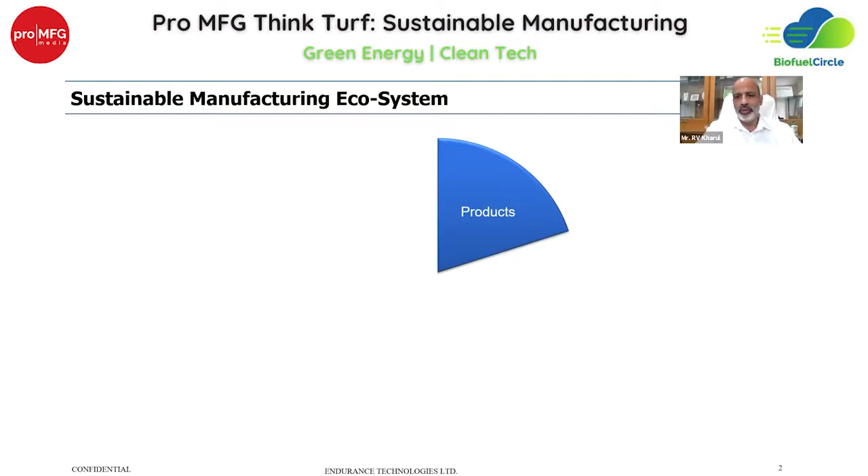For our products, like in the automotive industry, which I'm talking about since I've been in it all along, our vehicles run on fuel. So certainly the first thing is: can we eliminate the fuel itself? I'm sure that's not possible. So we start looking at: can we reduce it? First, if I do lightweighting, the requirement of fuel comes down immediately. So how do we do lightweighting, or other things, like getting onto hybrid vehicles or electric vehicles, so that we move towards more sustainable efforts.

There are many other things to do as well, not directly linked, for example, even reducing the plating, like hard chrome plating.

If we can reduce that, we are going towards more sustainable things. Once we look at all different aspects of product design, the next thing is what processes are involved. Are we really looking at sustainable processes? We can look at whether sustainable processes are being followed, reduce the number of processes, or look at which are environmentally friendly processes. For example, when we use a conveyor system in manufacturing, can we make good use of gravity and reduce the energy requirement itself?

Though it appears very simple, I'm sure it is quite difficult to implement everywhere. So at least wherever you can, that much you can reduce the energy. Every bit and piece of energy saved is helpful.

In the processes also, when you are using compressed air, can I reduce the wastage of that? Everywhere, if you see compressed air just letting go, if you close all those loopholes, I think you can save a lot. Later I'll show you how at Endurance we got a good benefit out of looking at all these small wastages too.

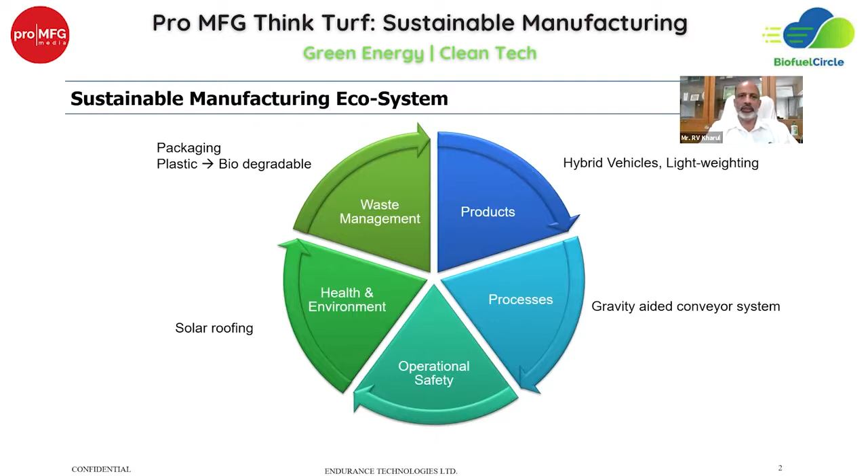When you look at sustainable lean manufacturing, it's also one more step towards sustainability. Looking at whatever the customer demand pull is, what are the things we are doing to ensure this sustainability? So start with a single piece flow, or start looking at load balancing capacity.

Applying simple principles like: do I require this process at all? Or can I eliminate it? Or can I reduce it? Or can I simplify it? Can I rearrange it? There are different things we can look at in order to make it more sustainable.

Then 5S at the workplace - though it appears unclear how it's going to have a sustainability impact, believe me, if you do that properly, you will be reducing a lot of waste, a lot of unnecessary efforts, a lot of non-value added activities, and that helps in enhancing our sustainability. Then just-in-time inventory also helps in reducing our inventory, which in a way means we are looking at sustainable products.

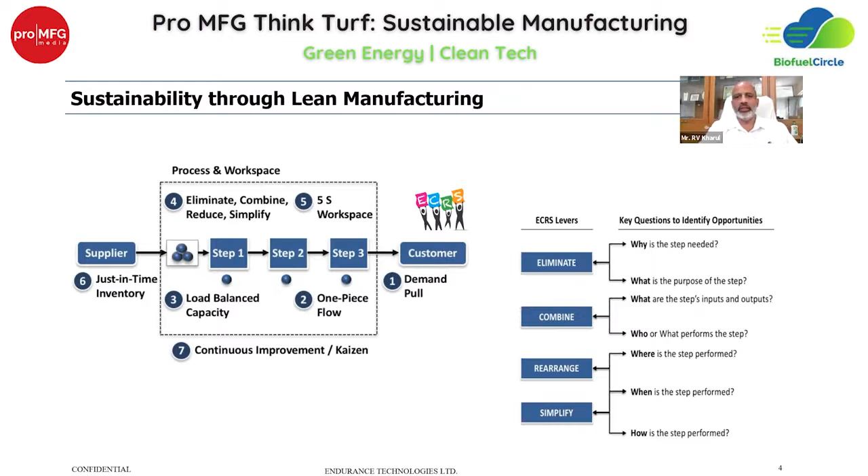So when we look at the keys to sustainability, the interesting thing I felt is that if we increase our vocabulary and imbibe the vocabulary of 're', I tried to put in as many 're' words here as possible. If you read through it, I think everywhere there is sustainability involved - whether it's replacing something with regenerating, rework, replenish, reform, reuse, reclaim. I can go on reading it. Everywhere you can implement it such that you inch towards a sustainable future.

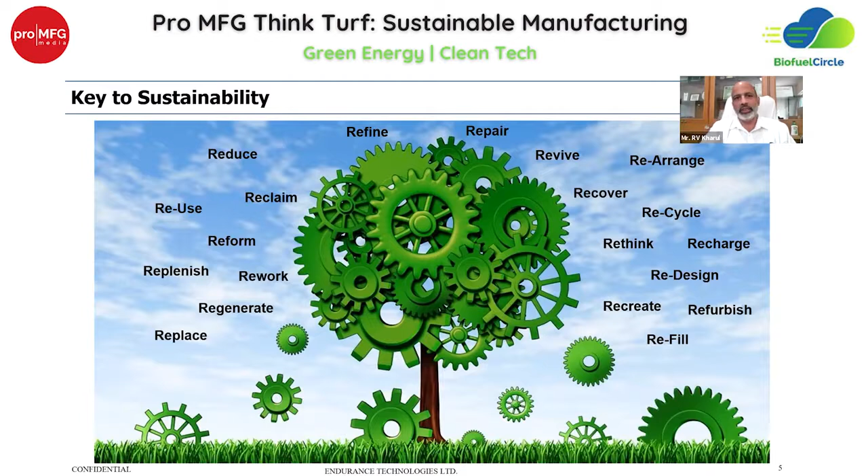Of whatever I discussed today, I'm coming out with a simple mantra on sustainability. If you carry that forward, I think I am successful in what I wanted to convey to this forum.

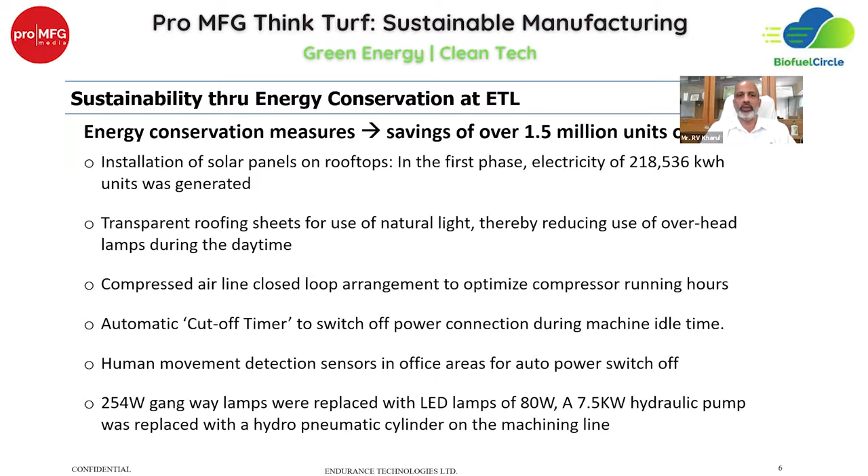At Endurance, we are concentrating quite a lot on energy conservation, and we have saved over 1.5 million units of electricity through various initiatives, starting with solar panels at rooftop, where we have established capacity of 5 megawatts plus, and transparent roofing to reduce the natural requirement of lights. These actions on energy conservation were well recognized by the government, and we got the National Energy Conservation Award in 2017 for the automobile sector, presented by our President Ramnath Kovind at that time.

The mantra for sustainability, what I feel, is ERCS: eliminate, reduce, combine, and substitute for each and every activity, wherever there is energy required, whatever the operations, process, or product. I think this is a simple mantra that can be implemented whether it is design, process, anything.

You can ask the question further. First, do I need that? Can I not eliminate it? If I can't eliminate, can I reduce it? Like fuel requirement - can I reduce the fuel? If I cannot reduce the fuel, can I combine? That's how today we have biofuels, where petrol is mixed with ethanol - 5%, 10%, 20%. If I cannot combine, or if I want still more benefit, can I substitute? EV is a good example of substitute to IC engines, but this applies not only to the product - even in the manufacturing process, this can be applied as a simple mantra.

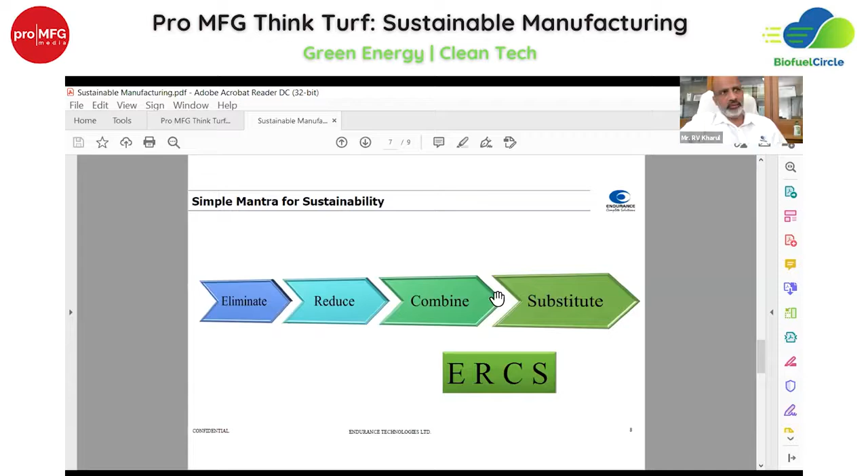Thank you. Thanks a lot for giving me this opportunity, and I wish all the success.

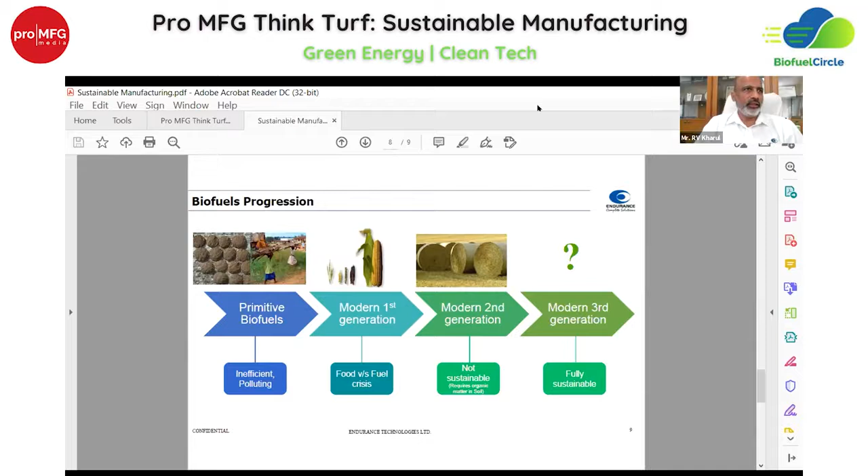And I think I will pick up from where you left off about substitution. My name is Ashwin Save, and I am the co-founder of BiofuelCircle, which is a digital platform for biomass and biofuels. The theme here is substitution.

But before we go there, this is how we see ourselves - as a catalyst, and the theme we work on is doing well by doing good. As part of these interactions, what we want to be is a voice for the circular economy.

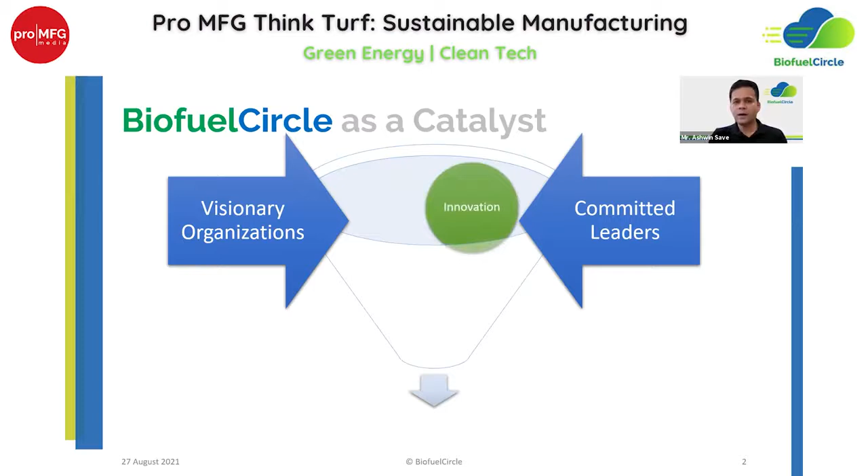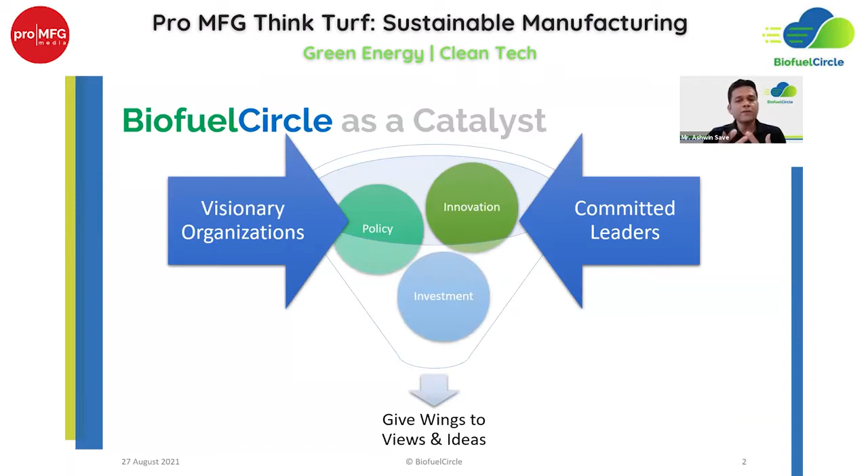We want to bring in some visionary organizations like we have today, and some very committed leaders in the panel, and bring all their thoughts together, bring the diversity they represent, bring professionals who can talk about approaches that are not theoretical but can cause significant, needle-moving change, and take this whole sustainability dialogue from philanthropy or CSR activity into business strategy. That's the idea behind inviting all of you together, where we can combine all of these and give wings to new ideas, help create a new business mantra built around circular economy and sustainability.

So what is the circularity concept, and where does bioenergy plug in? Just to share with you the potential that exists in our country.

Every year, if you look at the 10 major agriculturally rich states of India, they produce close to 650 million tons of biomass. Of that, 235 million tons is wasted - it is residual, not used at all. But should we, or when we are able to utilize it, we can meet 17% of the country's energy needs. That's a significant dent - 17% of our needs also translates to foreign exchange savings of 24,000 crore rupees. This is the potential that can be tapped should we address the residual biomass.

Now, this biomass is coming from farmers, which means it can provide additional income to them. We've estimated that for a typical 2-acre farm, biomass which is waste and thrown away can supplement farmer income by as much as 15,000 rupees.

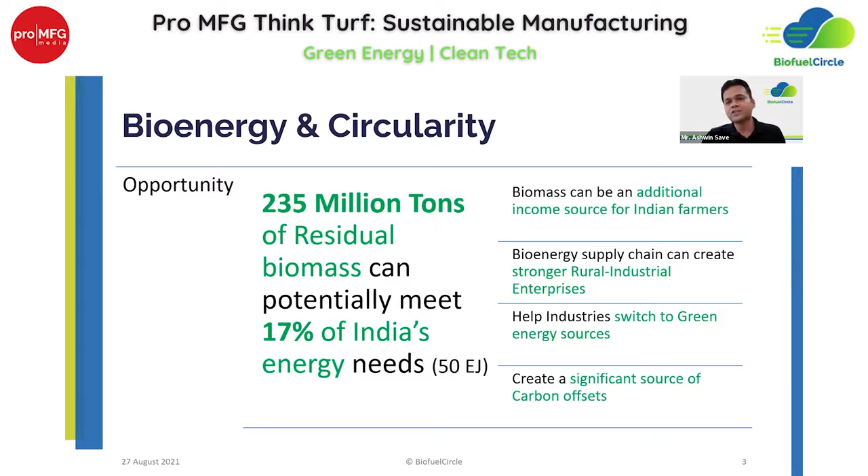By putting this supply chain together, we can create a linkage between rural and industrial enterprises, and help industries like yourselves make green energy choices, moving away from polluting fossil fuels to fuels which are green and sustainable. In the process, this also creates carbon offsets that can be monetized. Today there is increasing value for these carbon offsets. They were quiet for a while, but now this can be not just cost saving, but revenue generation, however small, for industries. So what are the problems?

Why is it that we are not able to utilize this potential? This is what we as a company are trying to solve. Let's start at the source. Indian farmers are typically small landowners, geographically diverse, and the farms are inaccessible. This makes it difficult to collect and a challenge to aggregate the biomass. The land holding is typically pretty small, and the amount of biomass or agricultural residue generated is also not large enough to move.

Now, if we go to the farmers, there is no incentive for them. They don't know, or there is nobody picking this up at economic value, which is why they end up burning it. You see the problems that happen typically in North India. Just to share a number, as much as 90 million tons of biomass is burned in and around the national capital region, and it's estimated that it costs the economy as much as $2 billion every year. Why do they do it? Once again, it's awareness and no economic incentive. The largest incentive, if at all, has to be economic.

Now if we are able to collect the biomass, the challenge is seasonality. There are two major crop seasons in a year, so agricultural residue is only going to be available for about 2 to 3 months. When you process it, you're typically going to hold inventory for 6 to 8 months. For a processor or aggregator, that is capital lock, so the cost of holding it is preventing this whole industry from scaling.

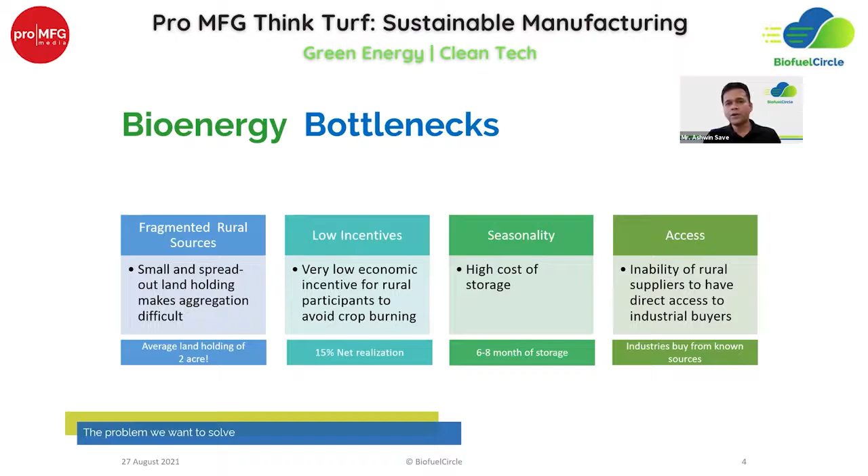And like yourselves, industrial buyers typically tend to buy from vendors they have cultivated over a period of time, because there is reliability and because you have worked with them, so they are known sources of supply. These rural suppliers, farmers, or even FPOs do not have direct access to industrial buyers. That's another problem we want to solve by creating an online marketplace for biomass, biofuels, as well as byproducts such as fertilizers.

We call this a farm to fuel ecosystem, a three-sided marketplace that connects not just buyers and sellers, but also provides the means for moving the goods from the seller to the buyer - that's transport. As you see in this graphic, it's taking biomass generated at the farm, helping rural enterprises and processors, plugging that into industry, providing the network in the form of transport as well as trade finance to facilitate movement of goods and access to capital, and bringing back byproducts such as biofertilizer or even green energy from biodiesel to farmers, thus completing a circular chain of this economy.

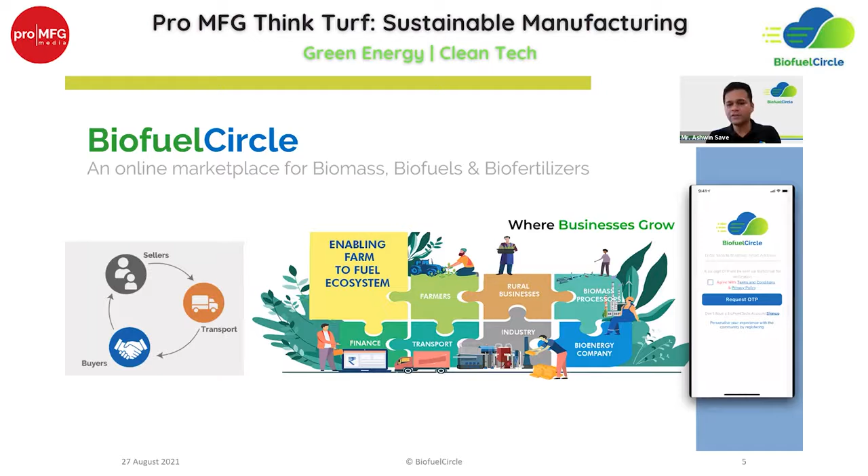How do we solve this on the digital platform? In order to connect all these various participants, we enable them to find each other, to promote themselves, to connect with potential suppliers as well as potential customers, and evaluate them so that before you do business, you know the party you're engaging with. We have rating mechanisms and profiles which enable our buyers and sellers to know upfront that this is a reliable party to do business with.

You can conclude a deal through various online tools, and we have various mechanisms, including auctions, by which you can discover prices and plan your procurement. Once you do that, you can move the goods through automated scheduling processes, tapping into our network of transportation, which works similar to your e-commerce apps, where you can track and trace where your goods are. You don't have to chase trucks and chase deliveries, and you can settle the transaction through paperless, digital means, where we have tied up with leading payment gateways like Razorpay.

Because we have an electronic record of all the activities, it enables us to bring in trade finance for the participants in the supply chain, who normally do not have access to low-cost finance. All in all, a complete solution for all biocommodities, and a marketplace.

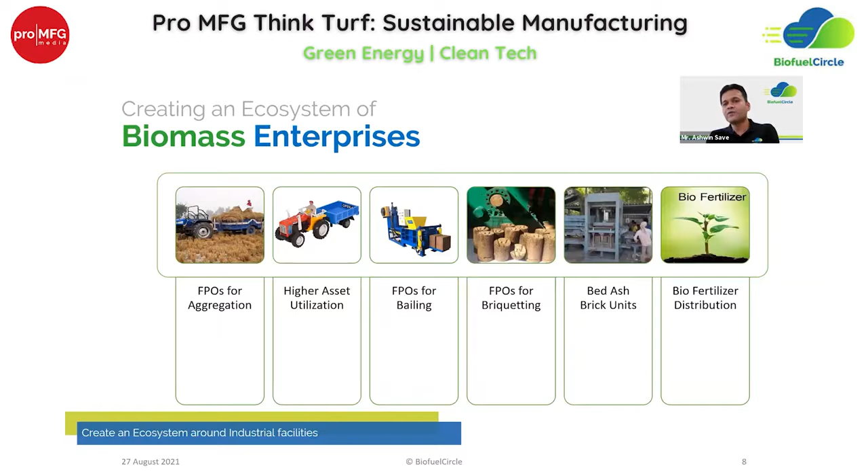Now, how do you benefit? Through digitalization, we would like to offer you wider choices - not just an expanded basket of suppliers, but reliable suppliers who we have vetted. We bring in transparency in the procurement process, allow you to reach non-traditional suppliers who can give you better prices, and bring efficiency into the whole supply chain activity.

We do that through a lot of community engagement, sharing information, creating awareness, and providing incentives to not burn the biomass but feed it into this ecosystem. In the process, giving industries access to green energy by building in tools such as blockchain, which brings traceability and gives you greenhouse gas or carbon credits that you can potentially trade.

Biomass or bioenergy, we believe, is a form of renewable energy that really touches the lives of people. Solar or wind energy, you set up something and it runs on its own. Bioenergy comes from the work of farmers, from the harvest they do, and by creating a rural ecosystem, we can help promote rural employment, give a boost to the rural economy, and in the process provide choices for green energy to manufacturing activities interested in changing to sustainability.

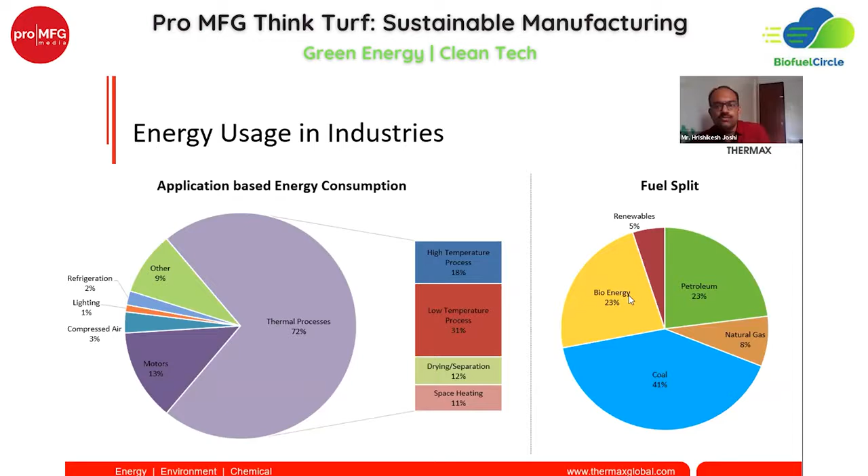As far as sustainable solutions are concerned, the majority you will see is this bioenergy of almost 23%, which is catering to the sustainable part of the fuels. Now, if we have to reduce this non-sustainable part, that is coal and petroleum mainly, the use of bioenergy needs to get more and more share of this particular pie, and that is where we are looking at bioenergy as the biggest source of sustainability when it comes to industrial segments.

What is bioenergy basically? Bioenergy is that energy which is derived from recently living organic materials. This is very important, that bioenergy is produced by organic or living materials, and you can see a lot of land use is associated with the use of bioenergy.

So you have some food producing farmlands, you have lands which are used for livestock, and there are lands which are forest lands, and lands where you are cultivating wood for the exclusive use as an energy source. And all this land is basically contributing to various forms of biomasses, which then go into a bioenergy spectrum, where it is used in various forms.

Also, many of these products coming from this land go into the consumption side, that is either direct consumption or in the industry, and then some waste is generated, and that waste again goes back as an input to the various forms of bioenergies.

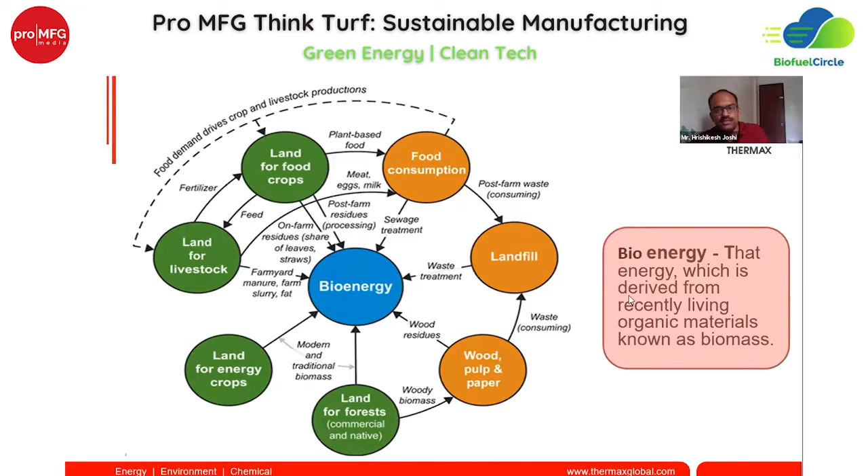So when we talk of bioenergy, typically we can classify them conventionally as solid forms, liquid forms, and gaseous forms of bioenergies. And you can see that solid forms, I'm sure everyone attending here is aware of this biomass, what is typically used. You would already be using it, or maybe you would have seen this being used by some of the industries.

So rice husk, wood chips, briquettes and pellets are the majority of solid fuels or solid biomasses which are used, and these are typically comparatively a good quality, high calorific value stock which is getting used in a direct form. So you just take it and use it in your boilers, whereas there are liquids like biodiesels and ethanols and gases which are used in various different setups.

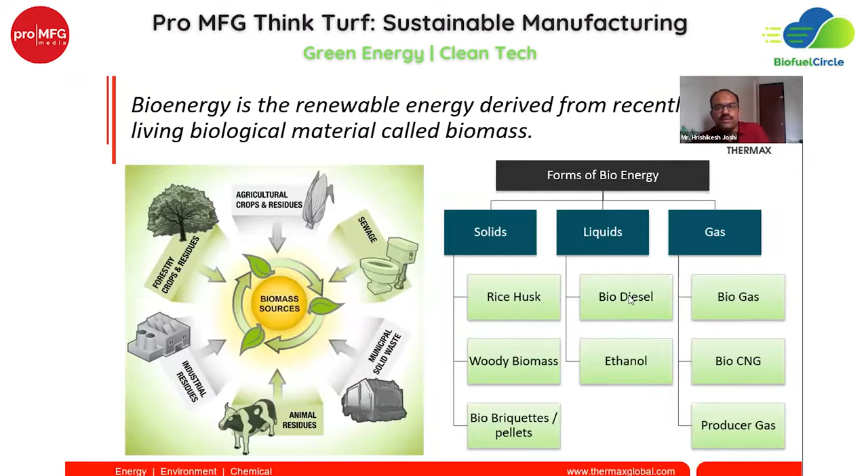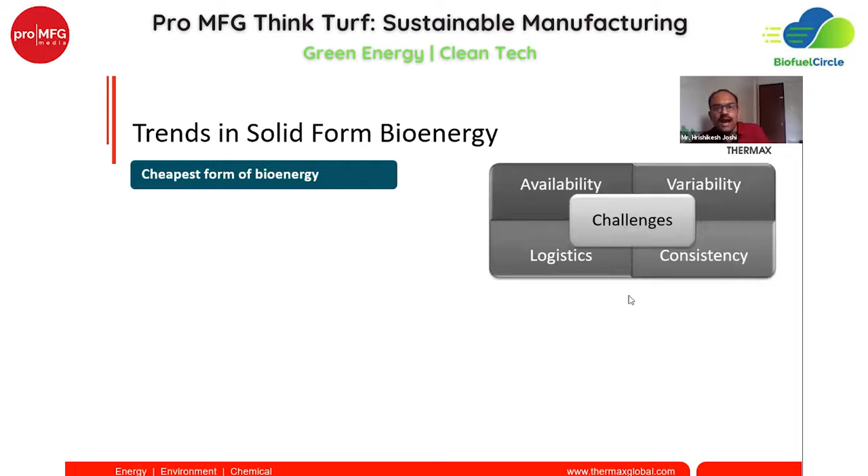Now, going a little bit deeper, when we talk of a solid form of bioenergy, it's the cheapest form of bioenergy. Why we say so is because it is consumed without any processing. So you collect the biomass from the fields and directly use it in your boilers, at the cheapest rate available, and that is why you will see that most of the low process heaters or boilers are getting converted onto biomass whenever and wherever there is possibility.

Of course, there are challenges associated with the use of biomass, because there is a challenge of availability. There is huge variability - a change in the moisture, change in the calorific values, ash percentages. The logistics is very difficult. Getting consistently the required amount of biomass around the year is also a very big challenge, basically because these are coming from the farmlands, and then they have a cyclic nature of operation.

To deal with all these problems, you obviously need a lot of logistical solutions. Plus, when it comes inside your factory and you start using it in your boilers, you need automated combustion, you need specialized boiler designs, you need pressure part cleaning technologies, because these fuels are in a way very dirty fuel, which creates a lot of fouling inside the boiler, and there are operational issues which you need to take care of.

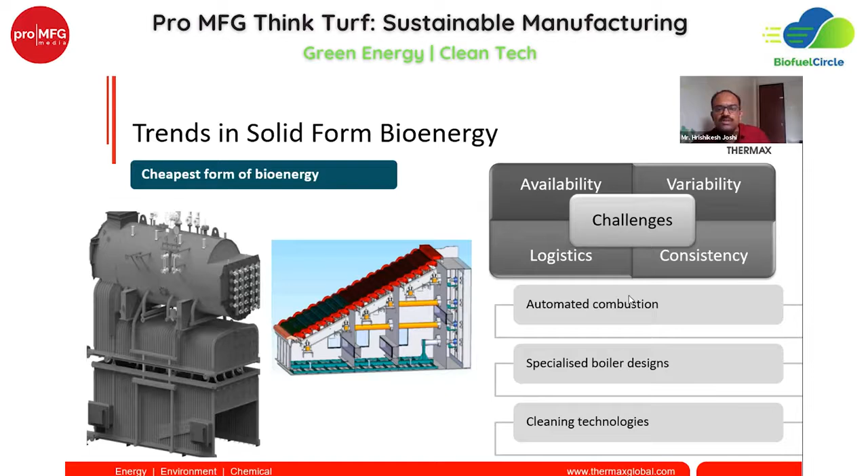So you basically need a very specialized solution for the biomasses, but when you do it, you would be able to get reliable energy and very sustainable energy, because all these fuels are carbon neutral fuels. So this is about solid forms.

When it comes to liquid forms, liquid bioenergy is not directly used in industries much. It is mainly used for mobility solutions, so we are talking of biodiesel or bioethanol. They may not be very economical for firing inside your boiler, but definitely they can power your vehicles or that kind of requirement.

There are stages of liquid bioenergy development. The first generation was with corn, maize and starch, and a lot of debate had happened with respect to food security versus energy security. That is where we entered the era of second generation production methods, where non-grain based feedstocks were utilized.

This is like rice straw, which many companies are right now setting up plants for. The first plants are being set up in India on a large scale, and we are expecting this technology will get a good trajectory, producing liquid bioenergies in very large quantums, while also solving problems like the burning of crops. So it's a win-win kind of situation.

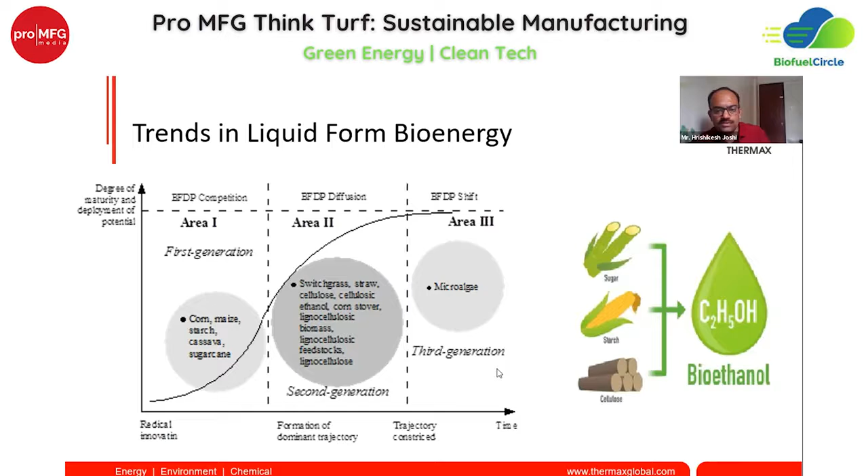This is currently under development, and people are setting up demonstration plants where algae is grown inside transparent tubes. That technology is some 100 times effective compared to the conventional biomass we use. This is where liquid bioenergy is heading, and the ultimate result would be bioethanol used more and more for transportation solutions and other liquid usages.

Coming to the gas form of bioenergy, a lot of action is happening on biogas or bio-CNG, wherein biomass is used to generate the biogas, which is then purified to the highest level until it becomes as good as natural gas, and can be used for any solution where natural gas is used - in industry as well as for transportation.

The best part is that it can use a very low calorie feedstock, for example wet things like food waste or wet waste from municipal wastelands. So all these kinds of low-end feedstocks can be used, and the gas can be generated and stored at very high pressure, then transported in cylinders, giving a good amount of flexibility. We would be seeing a lot of biogas or bio-CNG forms coming up in the future.

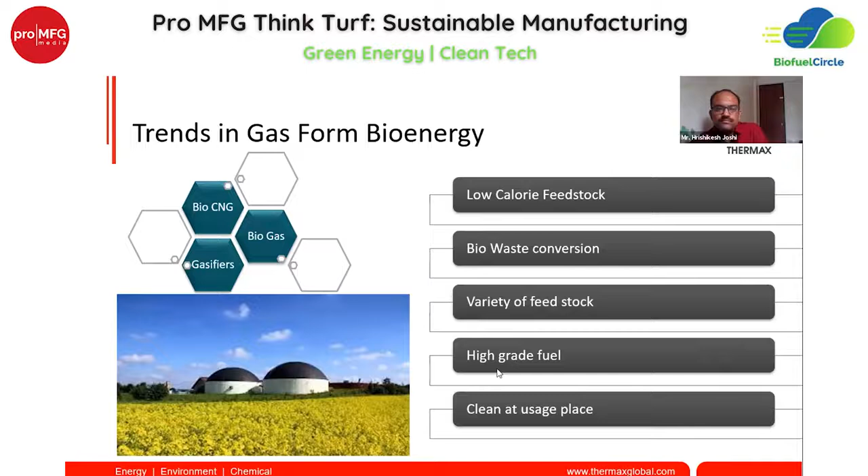So this is about the forms of energy and what we should expect going forward. Everyone is aware of the energy plantation happening in lots of areas, and there are debates now going on whether use of land for energy plantation is helping the environment or is counterproductive. I am sure going forward you would see algae production plants and these kinds of things also coming up.

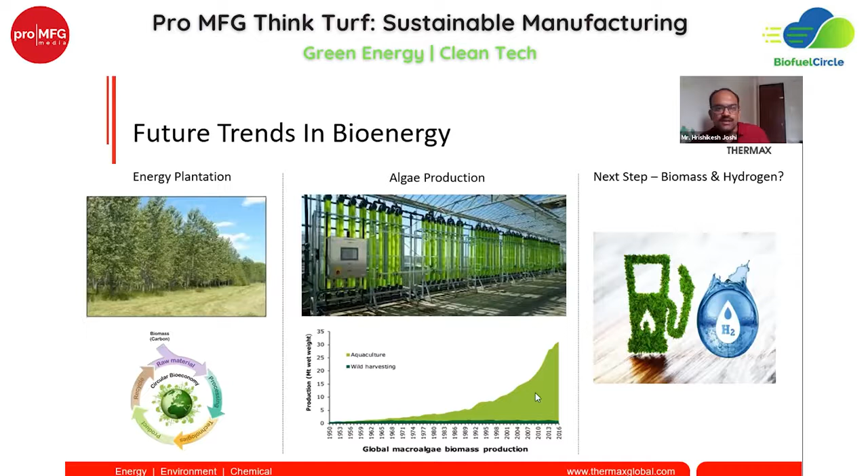And we don't know going forward, but a combination of biomass and hydrogen technology would probably create a few more exciting opportunities, particularly for the mobility sector. And that is where we can see this bioenergy going forward.

Lastly, just to introduce the organization which I represent: I'm here representing Thermax On-Site Energy Solutions, a 100% owned subsidiary of Thermax Limited. All of you are aware of Thermax Limited, Thermax Group. We are basically a 100% sustainable company, and we deal in sustainable solutions only. What we do is set up utility services, providing steam, chilled water, treated water, solar, cogen, everything. The entire investment part of the project, the technology part, the statutory part, operation and maintenance - basically everything required for this utility provision is taken care of by TOSIL. You can use it as outsourced utility and consume it on a usage basis, per unit basis.

So for example, if you have gone for steam, you can pay per kg of steam, and you don't need to bother about what's going on the boiler side. The entire logistics of the fuel, everything, is taken care of by us.